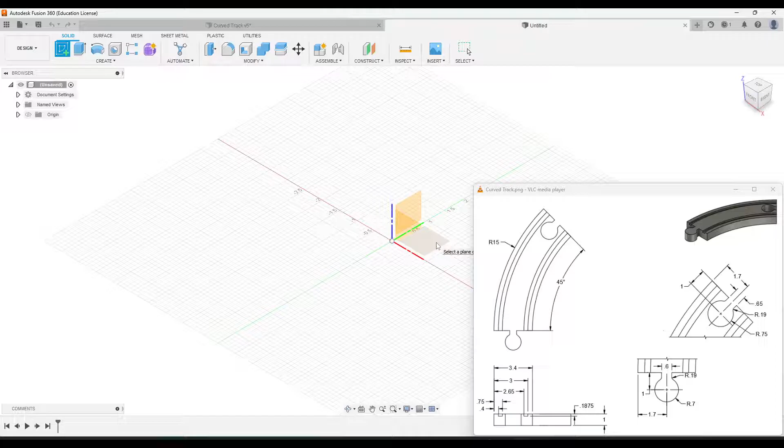One thing you'll notice is that in this view, it tells us that this outer circle for the track has a radius of 15 inches. So that means we're going to start with a circle, and I'm going to click the origin point, and we're going to have to enter in the diameter here, so we'll have to double that. That'll be 30 inches. And I'm going to have to zoom out so we can see this.

You'll notice that this is just 45 degrees. This part here is 45 degrees of that circle. So to draw those lines, I'm going to go to the line tool, and I'll go from the center here out, just straight out. Then I'll draw an angled one kind of up and to the right, or up and to the left. And then we can dimension that line to be 45 degrees.

All we are really concerned about is just this part of the line. We don't need the other part. So I'm going to go to the trim tool and cut off the extra part of that line.

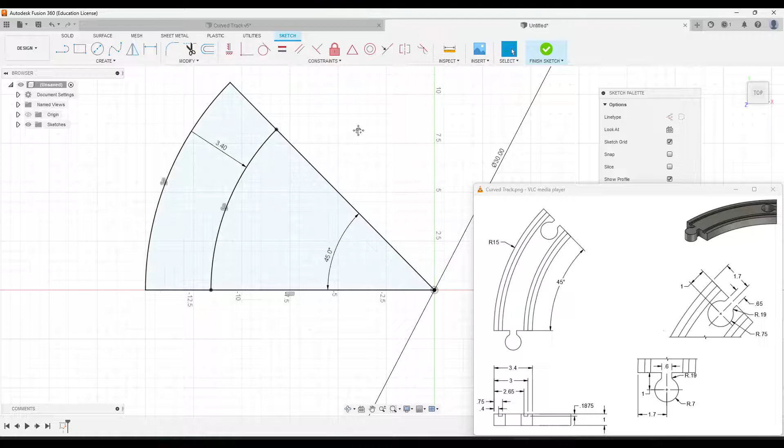So just this profile right here is going to be our track piece, and we don't need to worry about this part right here. I'm going to click on this line and make that a construction line. I'll click on this bottom one and make that a construction line too. Then I'm just going to draw over this to close off that profile because we don't need the other extra parts of this line.

So here's our basic track profile. I'm going to zoom in here, and we're going to make the bottom part, or this part, of the connector. We're going to do this the same way we did the straight track piece. We'll just start off with a circle. This circle has a radius of 0.7, or 1.4 for its diameter.

We'll go ahead and dimension that. Again, it's going to be 1 inch from that bottom line. And then it should be 1.7 from the side. We'll go ahead and add the lines to connect it.

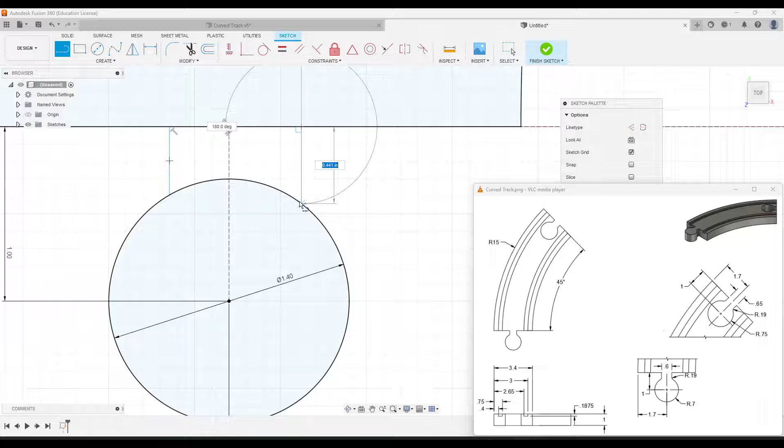The middle line, I'm going to make a construction line. Then I'll just draw 2 perpendicular lines to the side. Make sure you can see the perpendicular symbol when you draw these and that they're vertical. Then we'll dimension that. The total distance again is 0.6, so we need to dimension 0.3 on either side. So from one of the side lines to the center, it's 0.3, and from the other one to the center, it's also going to be 0.3.

We'll go ahead and trim off the inside parts of the circle that we don't need. Then we will add in the fillet right here on the inside edges. So use the fillet tool, and then click these 2 edges here, and that's going to be a round of 0.19.

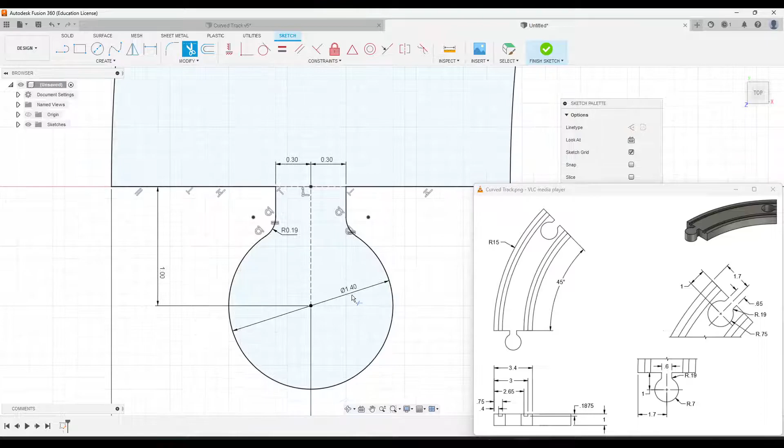The other thing I'm going to do is trim off the extra part of this so it fills this all in as one profile. I'll go to the trim and then just click the extra parts of that line that we don't need. So this bottom connector is done.

Let's go ahead and move up to the top. The top one can be a little bit tricky because it's kind of at an angle this time, but I'm going to start with the circle.

Actually, you know what, let's go to the line. I'm going to do the construction line first. I'll go to construction line and make that construction. I'm going to move along this line until I can see the midpoint, which is where that triangle is. I'll click there, and then this is the tricky part to this.

You want to make sure that when you're drawing this line that you can see that perpendicular symbol. It's kind of hard to see, but notice that perpendicular symbol right there, and make sure it says 135 degrees. So this circle is going to go in 1 inch, just like it was in the bottom one. So we'll click OK.

Let's undo that. Let's go ahead and enforce a perpendicular constraint between this line and this line, because mine did not take that perpendicular one. Make sure you can see this perpendicular symbol. If you can't, when you draw that line, go up to the perpendicular constraint, click this line and then that line, and make sure it's locked in place and can't move.

Okay, let's go ahead and draw our circle at the end of that. I need to uncheck my construction tool. So the circle is going to go at the end of this point, and that circle is going to have a diameter of 1.5.

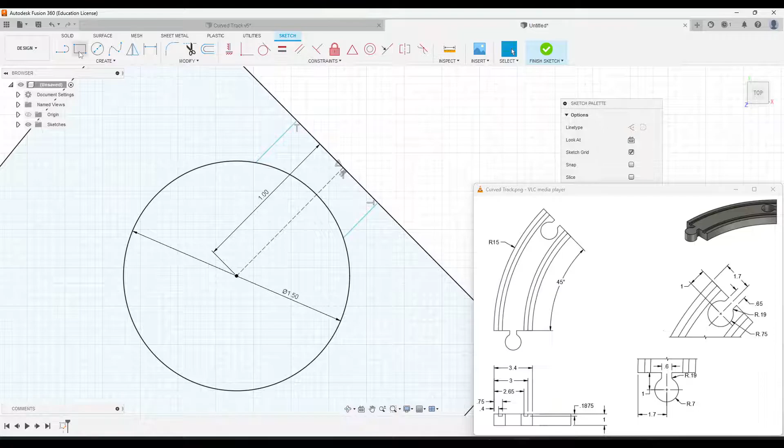Similar to what we did before, we're going to add some lines here on the side. Again kind of tricky, but make sure those are perpendicular. The total distance here is 0.65, so the length from here to here is going to be 0.325. And same for the other line.

Similar to what we did last time, let's trim the middle parts of this that we don't need. We can also get rid of the outer parts as well. Then we'll just have to add fillets to these two corners, and that fillet is going to be the same: 0.19.

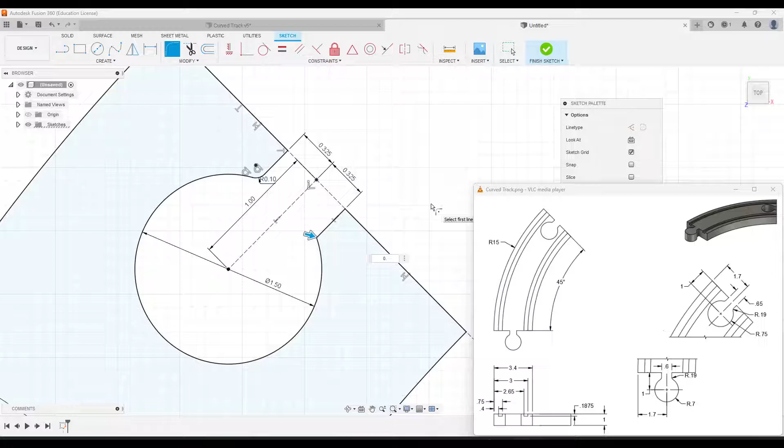Okay, that is the basic part of our curved track profile done, so I'm going to click Finish. Then we will extrude that, and it's going to be extruded 1 inch. Click OK. All right, the next part will make the grooves where the train wheels sit in.

I'm going to click on this, which is probably a little easier for you guys to see. I'll click on this one right here, and then I'll create a sketch. From this, we are going to make basically the two little grooves where the train is going to sit.

I'm going to go up to the line tool, and notice when I mouse over here it's not giving me any lines to reference. So I need to go up to Create, down to Project, and select a couple of these lines. I'll click on this line here at the top, as well as this one on this side, and also the left edge, since that's the one our dimensions are based on. Then I'll click OK.

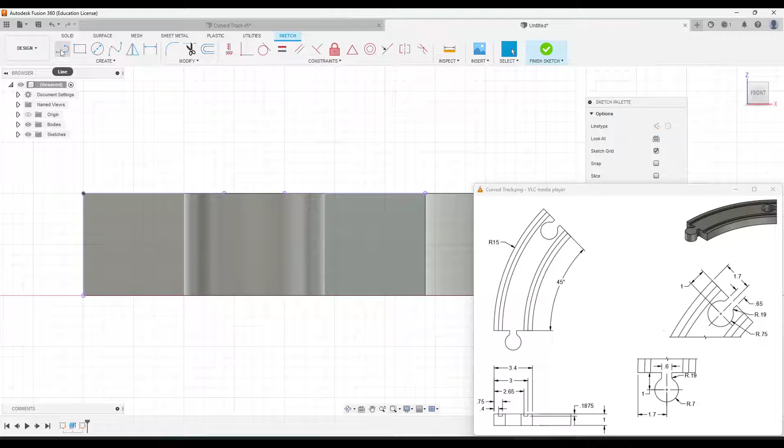You'll notice you'll have some purple lines there to reference. I'll click on the line tool and just roughly sketch what these profiles are, and we'll add some dimensions here.

Starting here on the left side, this first one, we'll go up to the dimension tool. From here to this first line, it's going to be 0.4. From the left line to the other line will be 0.75. And from the top to the bottom of it will be 0.1875.

Moving over across here, I'll do from the top to the bottom again. That's going to be the same thing: 0.1875.

And then from the left edge to here... oh, it looks like I have a constraint there. It looks like I accidentally clicked on the midpoint of this line when I placed that. So I'll click on this triangle and just delete that. Be careful when you automatically put lines there, because sometimes it'll automatically add constraints.

So I'll click on the dimension tool again and try to add this. This should be 2.65. And then I'll click the last line here, which will be 3 inches.

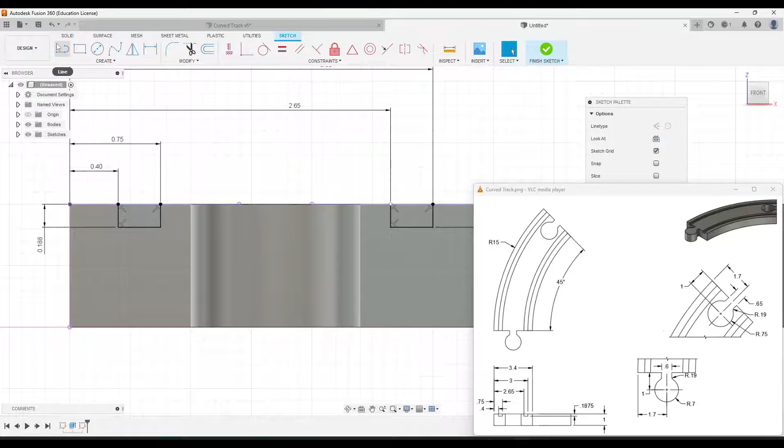The other thing we're going to need, I'm just going to go up to the line tool and draw across the top as well, just to make sure we have that line. It should be okay with the projected line we have, but I'll just make sure. Okay, I'll click Finish, and then click Home.

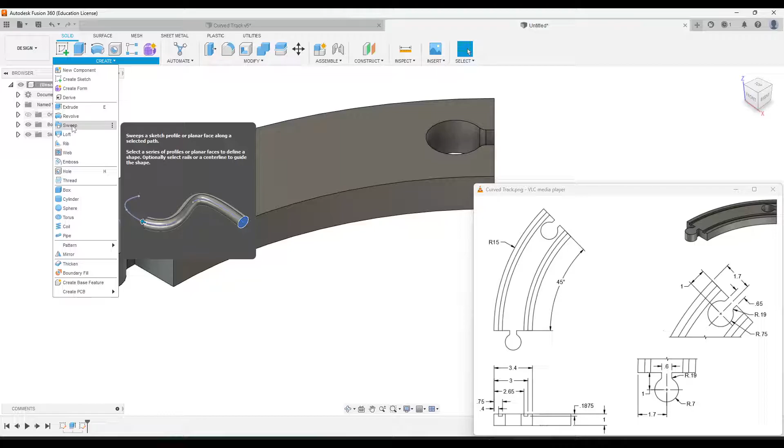All right, so what we're going to do, we'll use a new tool. We'll go up to Create, and then we're going to use the sweep tool, this one here. For the sweep tool, you want to select your profiles first.

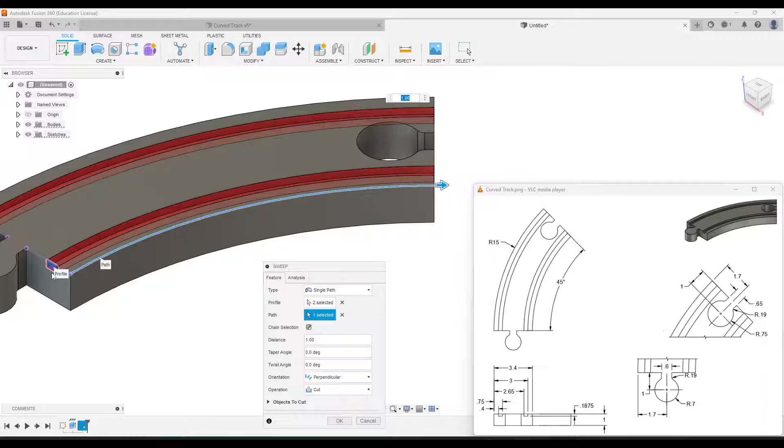I'm going to click on both little rectangles for the profile, and then for the path I'll click select. You can either click on this inside path or the outside; I'll just click on the inside one. You'll notice it should automatically change to cut, and those profiles will basically follow the curved path we selected. I'll go ahead and click OK, and that will be your curved track piece completed.